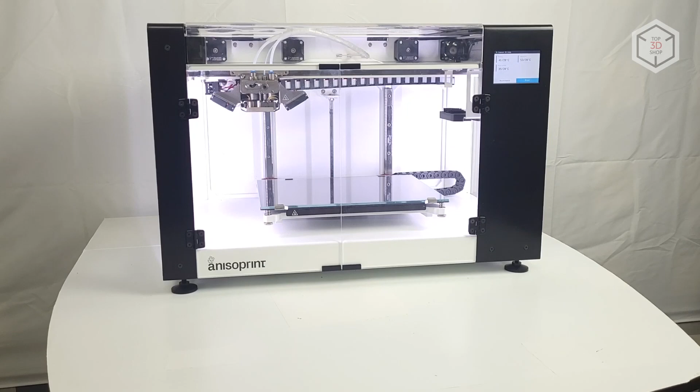Hi everyone, this is Top 3D Shop, and in this video we will tell you about the Anisoprint Composer A4 3D printer. Anisoprint specializes in making interesting 3D printer models capable of printing parts reinforced with continuous carbon or basalt fiber.

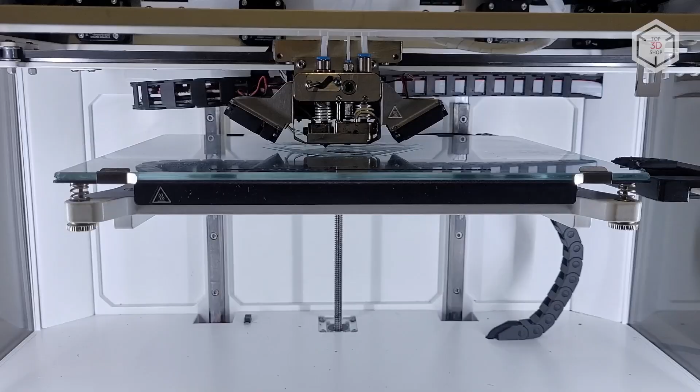On the internet, you can find different reviews and webinars about the company's printers, but most of them come down to impressive figures and descriptions of the technology's incredible possibilities. In this video, we would like to review this printer from the end user's perspective. We will talk about the specifics of its use, limitations, and peculiarities without boring you with a large number of charts, formulas, and terminology. Still, a little bit of theory might be helpful.

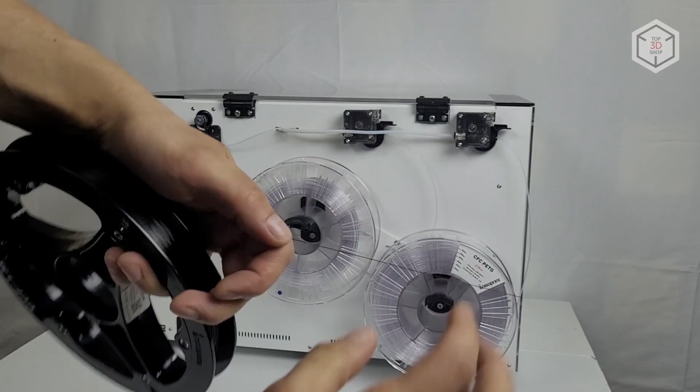Isotropic materials have the same mechanical properties in all directions, regardless of the load angle. Anisotropic materials, on the contrary, are characterized by different properties in different directions. For example, carbon and basalt fibers feature very high tensile strength along the fibers, but it takes much less force to break them across. It looks like anisotropy of the material could be considered a disadvantage, but with the correct load calculation and the appropriate algorithm for laying the fibers, it is possible to obtain lightest parts with the strength concentrated in the proper areas and maintained at the corresponding load angles.

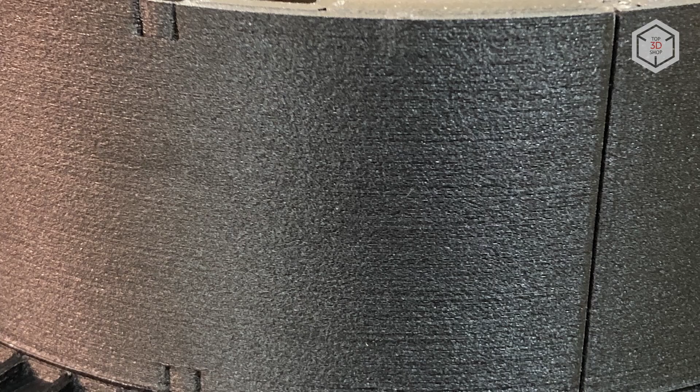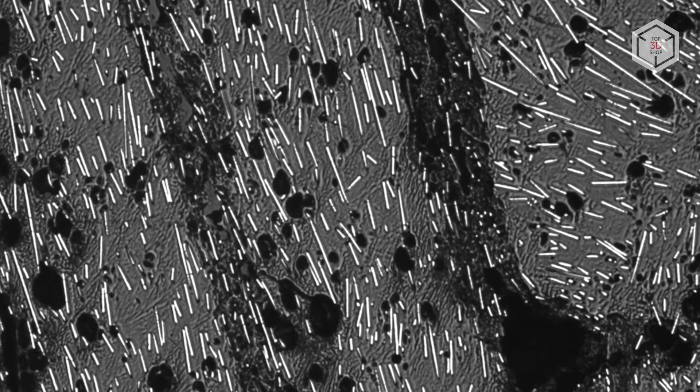In recent years, so-called composite, or more correctly, filled filaments, have become popular in 3D printing. They are two-component materials consisting of thermoplastic and carbon or glass fiber filler. Such filaments are stronger, stiffer, and show less shrinkage than basic thermoplastics, but carbon and glass fibers are added to such filaments in a milled form. Thus, one of the most useful properties of the fibers, namely the highest tensile strength, is almost totally lost in filled filaments. Composite materials made of continuous fibers have been utilized in manufacturing for quite a long time.

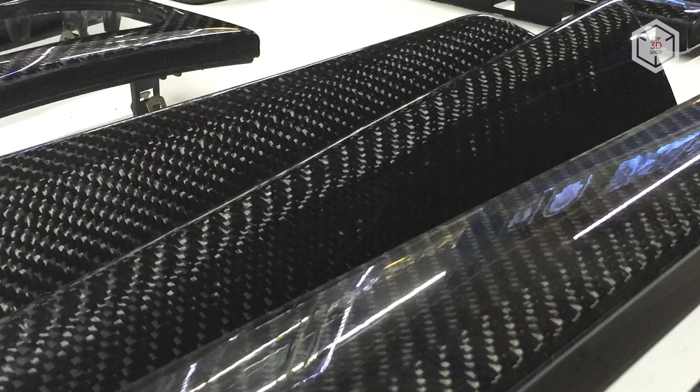They are a kind of fabric with carbon or basalt fiber being used instead of threads. The fiber can be either one-directional or laid out at different angles in several layers. We will not go into detail except to say that such materials naturally possess good strength properties, but on the other hand, they have their drawbacks as well.

In addition, there is a way to create so-called mesh structures out of continuous fibers. Such a method with proper load calculations makes it possible to create more durable, still several times lighter in weight parts compared to similar aluminum models, for example. Such use of fibers allows making the best out of anisotropy.

Based on their experience with such types of carbon and basalt fiber laying, Anisoprint engineers created their proprietary 3D printing technology, which they call Anisoprinting. Those following the development of additive manufacturing long enough are aware that a similar technology has already been used by the Markforged company, and they are really much alike. However, there are a few noteworthy differences. We will touch upon them in the course of our review.

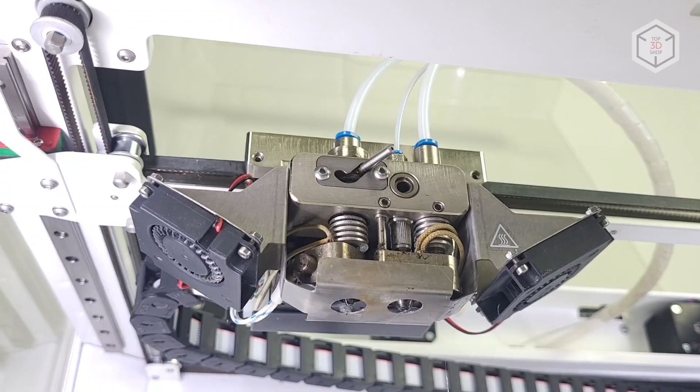Now let's take a closer look at the printer. We have the most compact model of Anisoprint 3D printers, that is the Composer A4. We should mention that this particular sample has been displayed at many exhibitions and printed a huge amount of parts, so don't be surprised that it doesn't look brand new. As long as Anisoprint is constantly refining and improving their printer models, some parts may appear to be slightly different from what is being produced at the moment. However, the operation principle and basic idea remain the same.

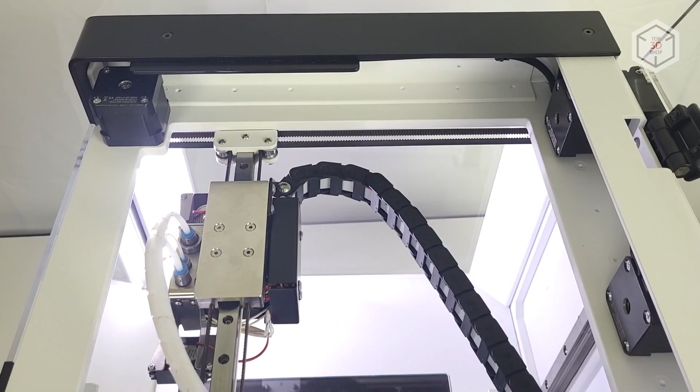The design of the Composer A4 does not differ much from most 3D printers we are used to. The build area is 297 by 210 by 140 millimeters. The frame is made of 8mm aluminum, which gives the printer a large margin of safety. The device feels very reliable.

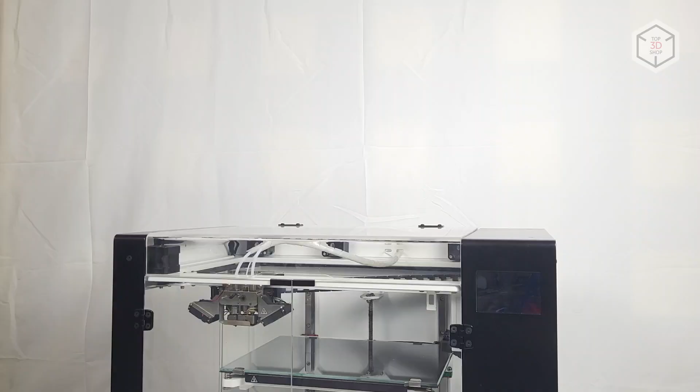The printer is lined with acrylic sheeting. It has two doors with magnetic locks at the front. On top of the machine is a hinged cover. It can be opened when printing low-melting materials to avoid overheating of the plastic. When printing with high-temperature filaments prone to shrinkage, the top cover and front doors can be closed to create a passive heated chamber. In the right top corner at the back, there is an exhaust fan that automatically turns on when the temperature inside reaches 60 degrees Celsius.

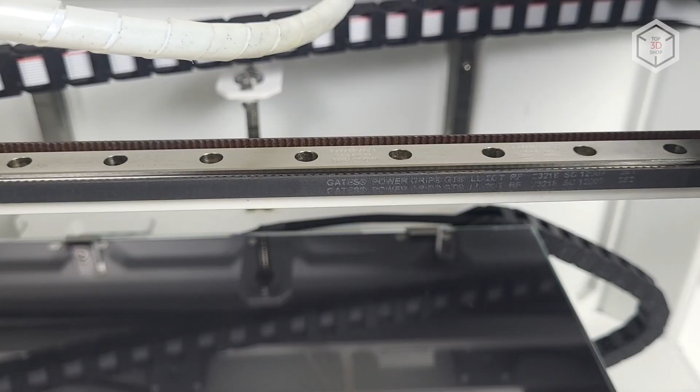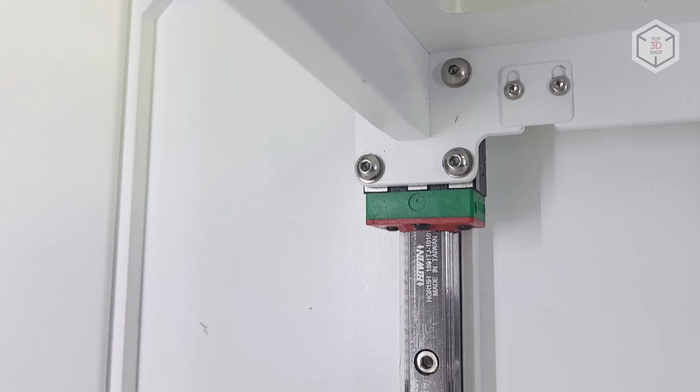The kinematic scheme here is classic Core XY. The print head is moved with two long 8mm belts produced by the Gates company. The X and Y axes move along high-quality 12mm HIWIN rails. They are driven by NEMA 17 stepper motors mounted at the front of the printer. The Z-axis runs on two 15mm HIWIN rails, and it is driven by a screw motor.

A trapezoidal single-thread screw comes out directly of the motor without any couplings. The motor itself is located inside the lower compartment.

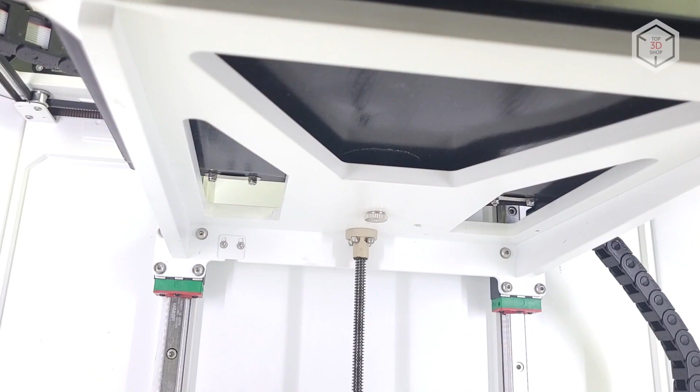The print bed is cantilevered, meaning it is attached to one side. Nevertheless, the bed frame is massive and solid so that the bed does not sway during printing.

It is covered with a glass build plate which is held in place with two fixed brackets in the back and two hinged ones in the front. The glass can be easily removed and put back on.

The maximum print bed temperature is 120 degrees Celsius. Calibration is done manually by 3 points using a software assistant, but more on that a bit later. All of the printer's end stops are optical, which gives high-axis positioning accuracy before printing.

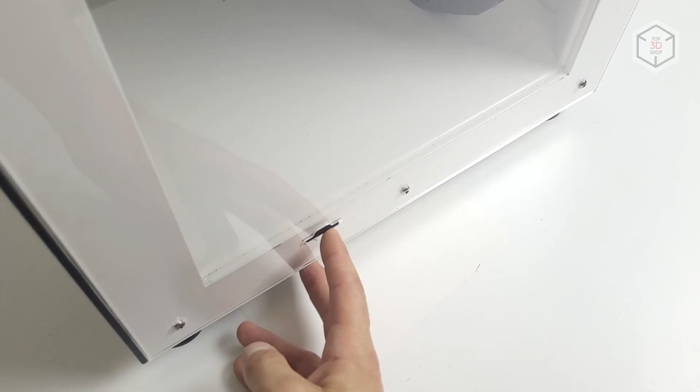You can print from a full-size SD card or via a USB cable. The port for an SD card is on the right side of the printer.

The extruder - to be more precise, there are two extruders here. On the left, there is the usual hot end with a hardened 0.4mm nozzle, which can be changed to a 0.6 one. The nozzle type here is V6. This hot end is utilized for basic or filled filament printing.

It can be used alone when printing standard polymer parts, or together with a composite hot end to print fiber-reinforced models. The left hot end has a lifting mechanism so as not to interfere with fiber printing. The mechanism is quite simple, but due to that, it is very reliable. There are no servos or other motors used to switch hot ends.

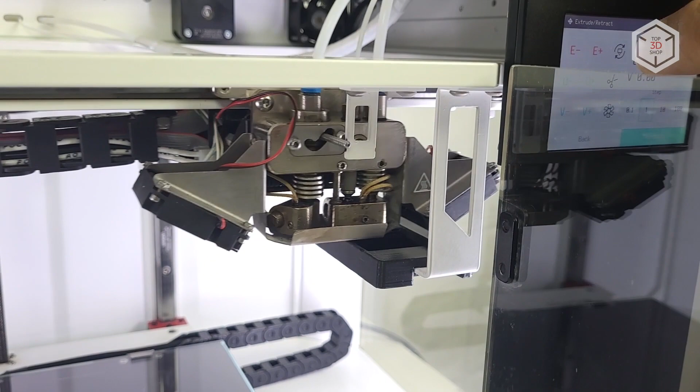The print head travels to a special projection on the right, which moves a lever in a V-shaped notch. While moving from left to right, the hot end goes down, and moving from right to left, it goes up.

The right composite extruder is developed in-house by Anisoprint. It has a special nozzle with a diameter of 0.8 millimeters. The reinforcing carbon or basalt fiber is fed into the hot end from the top.

The polymer is fed into the same hot end from the right side, and then it comes to a special compartment in the way of the fiber. Passing through this compartment, the fiber collects a small amount of plastic and is extruded on the part. This is necessary to ensure proper adhesion with the previous layer.

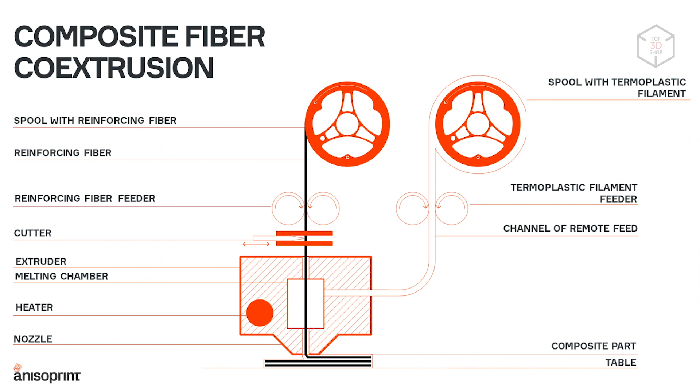On the top of the hot end is a fiber cutting mechanism. It is a rotary knife, which is driven by a servo motor hidden inside the print head.

Whenever it is necessary to switch from one hot end to the other, shortly before that the knife turns, cutting off the fiber. After that, the print head travels a certain distance to allow the remaining fiber to be extruded on the part. Then you can make the transfer or switch the hot end.

The print area is cooled by two 4010 turbine fans located on both sides. To prevent the fans from blowing on the heating units, there is a metal barrier at the bottom.

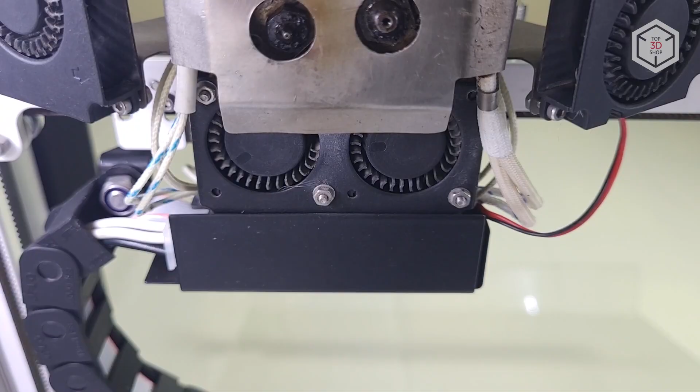Two 4010 fans are used to cool the heat sinks of the hot ends. They are located in the back and turn on automatically when the temperature of the hot ends reaches 60 degrees. All the printer's fans are manufactured by the GDS Time Company. They are pretty quiet and do not produce any tangible vibrations.

To make sure that after downtime the hot ends are not clogged with leaked polymer that can spoil the model, there is a small part on the right designed to clean the hot ends and collect the remnant plastic.

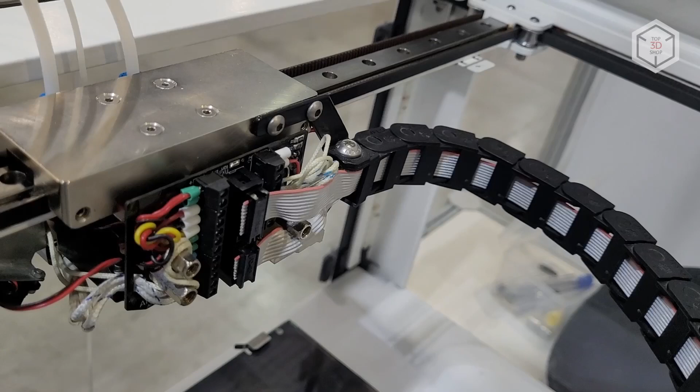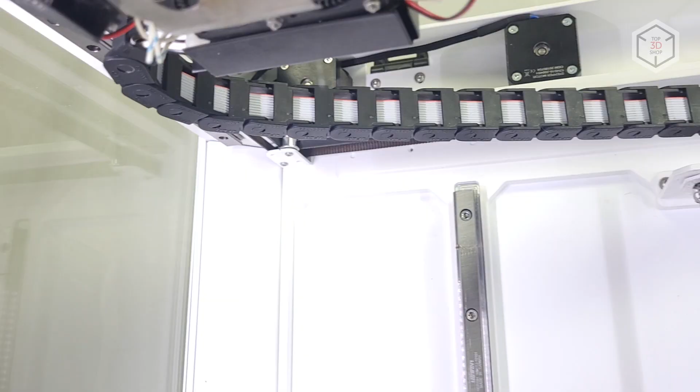On the back of the print head, you can find a distribution board. The wires from the sensors and heaters are connected to the board, making it easy to replace damaged elements if necessary. The wires from the board are arranged in a cable chain. It's worth mentioning that all printer wires are neatly routed and hidden, so nothing dangles and spoils the look.

Both printer extruders are Bowden type. The feeding mechanisms with motors are placed on the back wall, and both polymer and fiber are fed through Teflon tubes. This model uses Titan-type geared feeders for plastic.

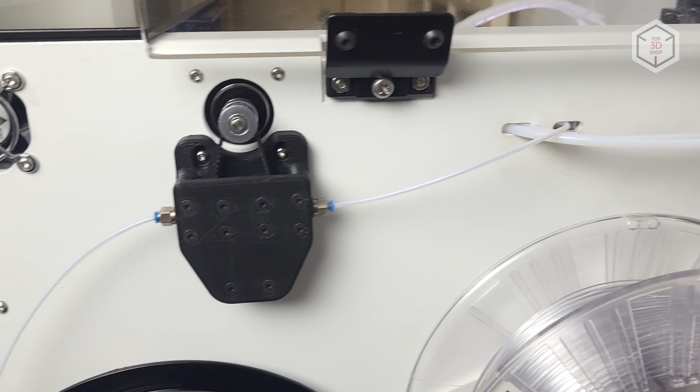For the fiber, Anisoprint has designed a proprietary feeder. It uses two small circular adjacent belts. The construction allows the fiber to be fed without slipping, and the belts do not damage it while moving.

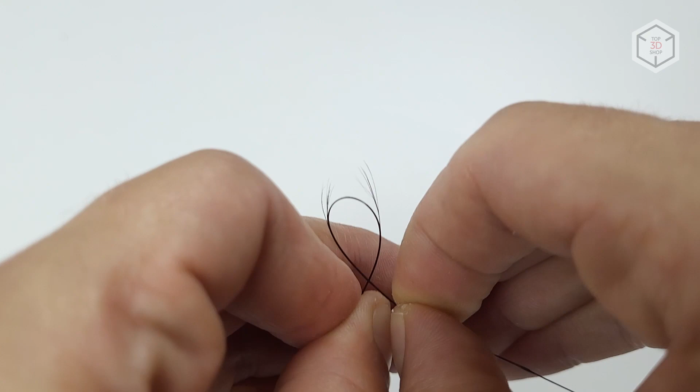Now, what is this fiber all about? To begin with, it looks like a solid string with a diameter of about 0.36 millimeters. But in fact, it is a bunch of very thin fibers, carbon in this particular case, impregnated with a special resin. This provides the string's uniformity and ensures that it does not split when being fed and can be accurately extruded while printing.

The manufacturer strongly recommends the use of Anisoprint proprietary fiber made with their patented technology. You can, however, give a try to third-party fibers, but this can lead to serious extruder clogs. For the auxiliary plastic used along with the fiber, as well as for the left hot end, you are free to use any filament types by different manufacturers.

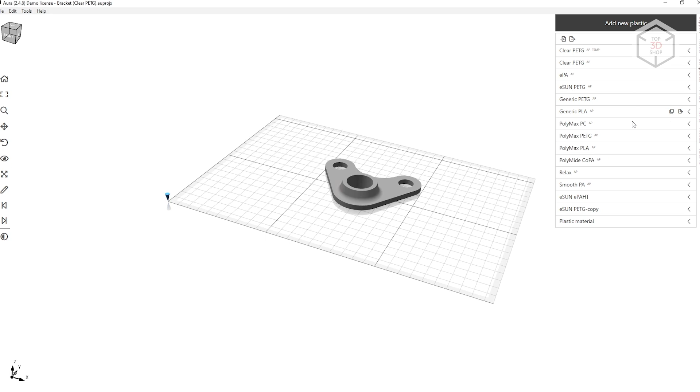This is one of the differences between the technologies used by Anisoprint and Markforged. The latter also uses prepared fiber, but it is directly impregnated with thermoplastic, usually nylon. The composite hot end feeds and immediately fuses it. For this reason, you have certain limitations on material compatibility. As a consequence, with Markforged you're not only restricted to the proprietary fiber, but the plastic for the other hot end can only be selected from a small suggested list, as the slicer limits your choice of settings to a great extent.

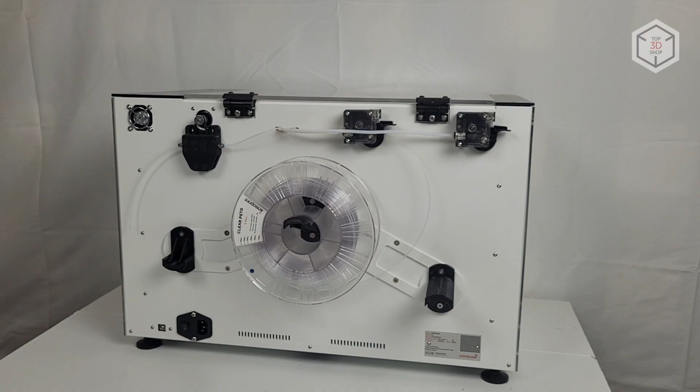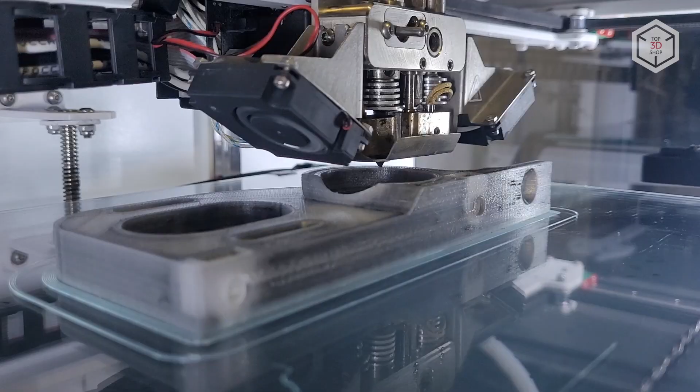Certainly, Anisoprint also recommends using plastic and fiber tested by the company's engineers. In this case, you're more likely to get the desired results, but potentially you have the opportunity to experiment with the printer and both plastic and fiber materials, as long as they are compatible with the hot end design. The Aura slicer, with an open license, allows you to adjust the printing parameters very precisely, which gives you room for experimenting, albeit at your own risk.

In addition, the composite extruder construction and the system of co-extrusion of fiber together with plastic allow printing not only reinforced contours, but also reinforced infill. This provides better control over part strength and helps reduce their weight.

There's not much point in speaking about the control board and electronics of this particular printer modification, as recent versions feature quite different electronic components. Anyway, it has no effect on the performance and capabilities of the device, except that new versions are equipped with a more modern and high-quality board.

In the right top corner of the front panel, there is a touchscreen used to operate the printer, with a quality sensor and the menu interface reflecting the printer's distinctions. The main screen shows the temperature of the two hot ends and the heated print bed.

By choosing the corresponding option, you get to the heating menu. Here you can manually set the desired temperature. There's also a button to turn the heating off and the auto button. By tapping it, you set the last temperature used. Both hot ends can heat up to 270 degrees Celsius. The maximum print bed temperature, as mentioned, is 120 degrees Celsius.

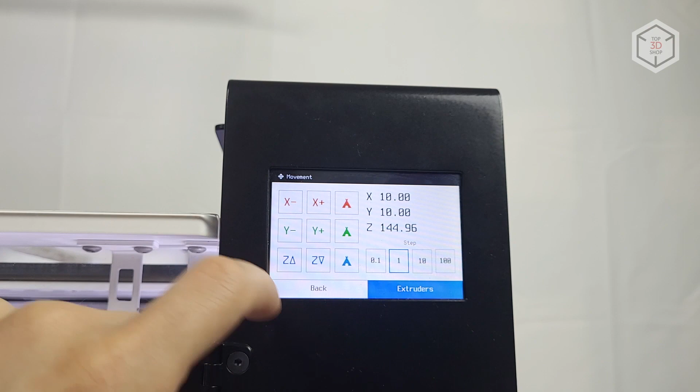The maintenance menu contains all the other functions and settings. The materials option is an assistant for loading and unloading all materials. The move menu allows you to manually move the axes of the printer. With the extruders option in the move menu, you can control plastic and fiber feeding, as well as manually start the extruder change mechanism, cut the fiber, and turn on the print area blowing.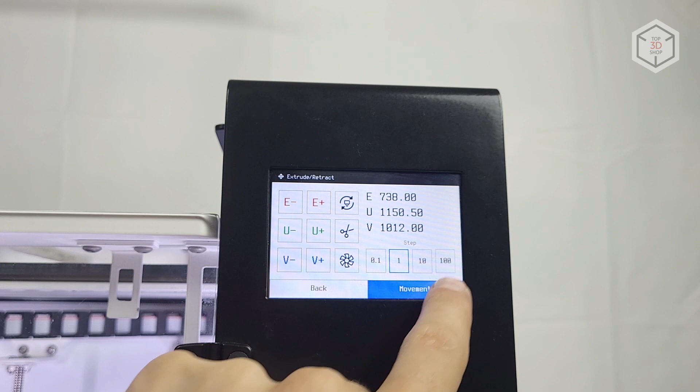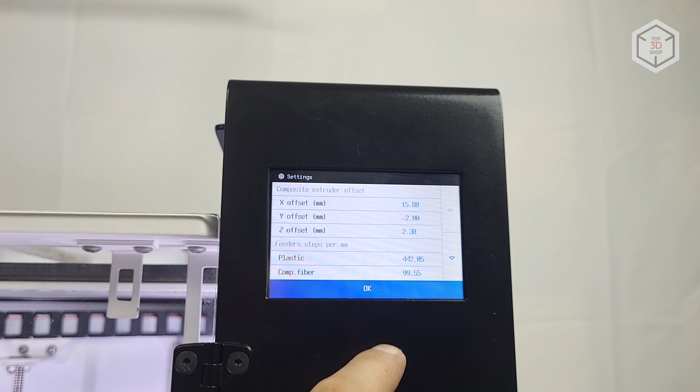The calibrate menu contains the print bed and hot ends calibration assistants. In the settings menu, you can manually adjust the offset of the hot ends from the print bed and each other. These parameters can be adjusted during the calibration process. There are also steps per millimeter and PID settings, but these are factory configured and you don't usually need to change them. The debug info menu contains data on the axes and heater status.

In About Printer, you can find information about the printer version, firmware, etc. And last but not least is the print option, which allows you to send G-code files for printing.

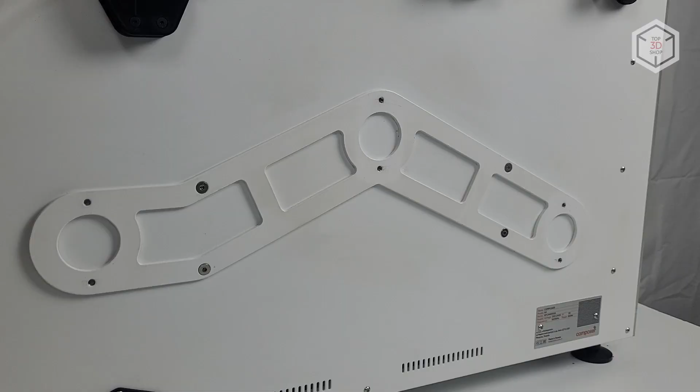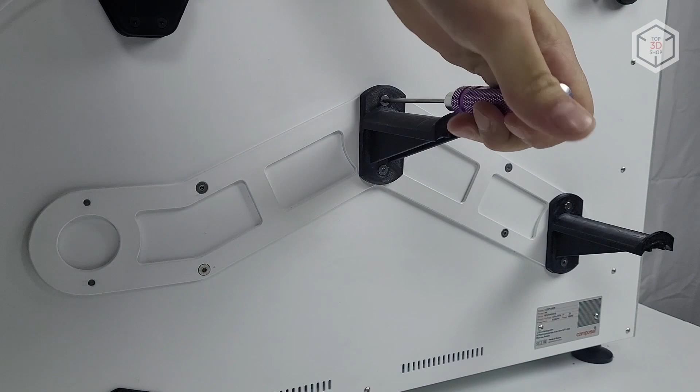Now let's move on to the printer preparation, calibration, and print tests. The printer comes fully assembled. The only thing you need to do is screw the filament and fiber spool holders to the back wall. When you look at the back panel of the printer, the filament spool holder for the left extruder should be in the center. On the right is the auxiliary filament holder for the composite extruder. The short holder for the fiber spool should be mounted on the left.

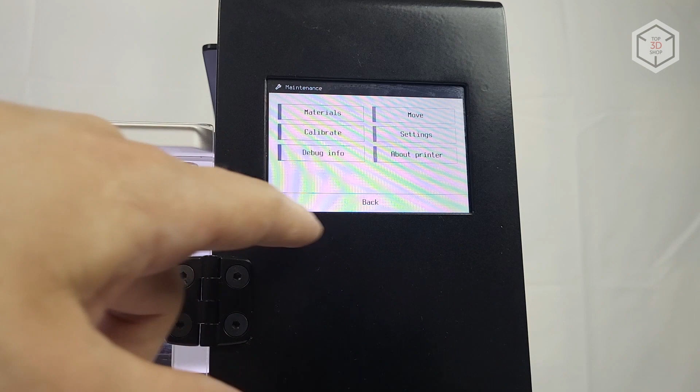The next step is to calibrate the print bed and the extruders. The printer menu offers the corresponding assistants. First, go to the Calibrate Build Plate menu. The printer will prompt you to heat the bed to the temperature required for printing. When it is done, the print head will pull back to the rear center point, where one of the three adjusting screws is located, and go down to a height of about 10 millimeters. Via the printer menu, gradually raise the print bed, reducing the distance.

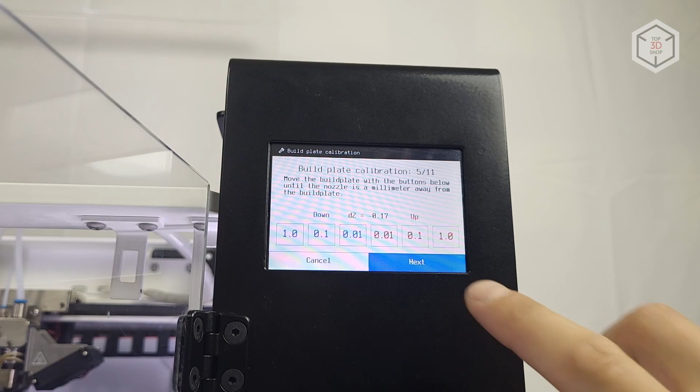Put an A4 sheet of paper between the nozzle and the print surface and wait until you feel the light resistance of the paper sheet when it is moved, just as it is done with any other printer. Press Next on the screen, and the print head will move to the near left corner. Adjust it with the help of a paper sheet by simply turning the screw. Once again, press Next and adjust the right corner in the same manner. Then repeat the entire process to make sure the bed did not tilt during the first adjustment.

Next, it is necessary to check the left extruder offset on the Z-axis. Go to the Calibrate Z-axis menu. The print head will move to the center of the print bed and stop at the height of 10 millimeters, just like with the first calibration. There's nothing new here. Just put a sheet of paper and move the print bed up via the printer menu until the paper can be moved with a slight resistance.

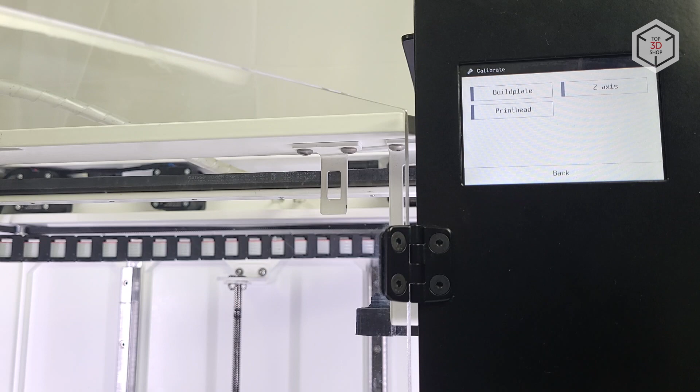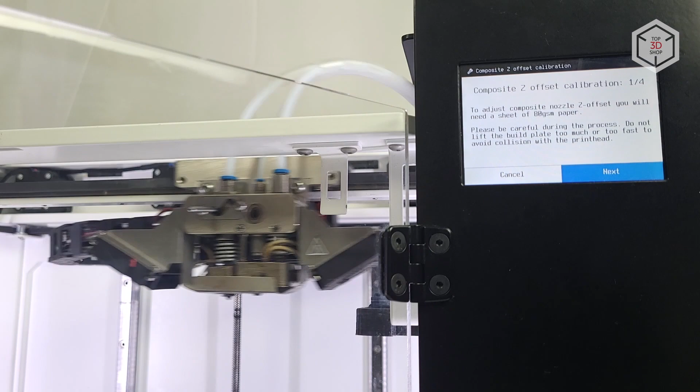The next, and probably one of the most important steps, is to calibrate the offset of the composite extruder from the plastic one on the Z-axis. Go to the Composite Z-Offset Calibration menu. The print head will move to the side and elevate the left hot end. After that, it will go to the center. As in the previous step, adjust the height of the right extruder with a sheet of paper. In this case, the sheet should pass between the nozzle and the print bed almost freely, with the right distance being about 0.3 millimeters. At this point, it is difficult to know if the composite hot end is leveled properly, and it requires certain skill.

If the hot end is too high, the fiber will not adhere well. If it is too low, the fiber can break and clog the composite hot end when extruded into the plastic. And that is not the experience we would wish anyone to gain. Cleaning the composite hot end is rather troublesome.

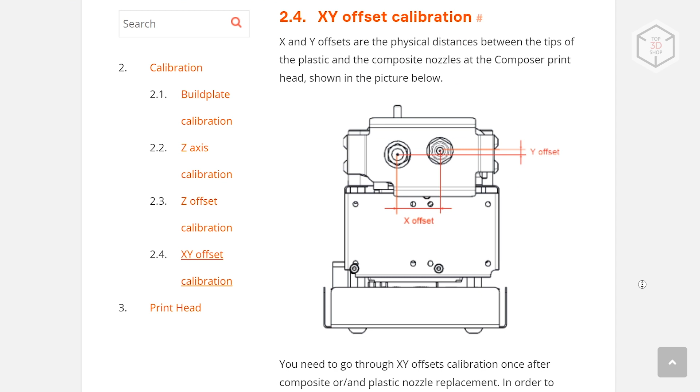The last thing to do is calibrate the XY offset of the hot ends. For this, you need to print a test G-code file, which can be downloaded from the Anisoprint website. Be sure to load the printing materials beforehand. If the printer is new, you can start loading immediately.

But if it's been in use for some time, it is highly recommended that the composite hot end be thoroughly cleaned. To do this, via the printer menu, turn on the composite extruder heating to the temperature you used last time. Now you can clean the hole all the way through from the nozzle to the hot end with a small drill or a special needle. While cleaning, you will see plastic remnants on top. You need to carefully remove them with fine tweezers. Continue until you are sure that the channel for the fiber flow is clean and has no residue on the walls. After that, you can start loading materials.

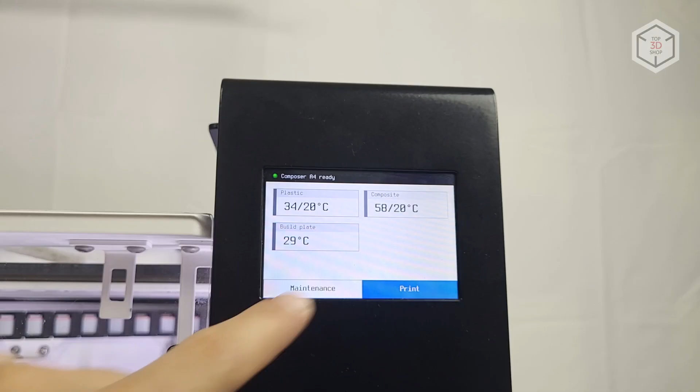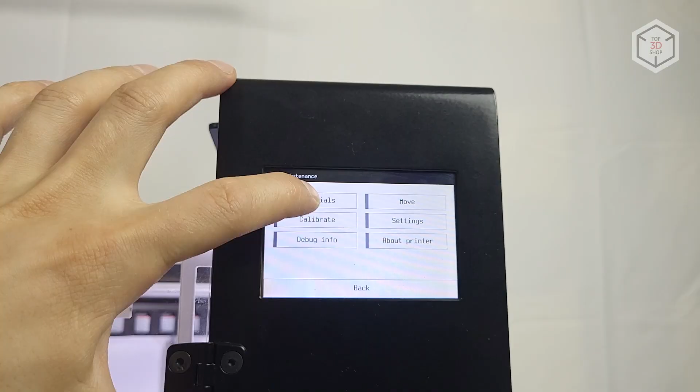As with the calibration process, there is a special assistant in the printer menu to help you do this. For the left hot end, everything is simple. Its spool should be located on the central holder, and the left hot end feeder is in the middle. Insert the tip of the filament into the feeder. Go to the Materials, Plastic, Load menu. Heat the hot end to the desired temperature and then follow the instructions on the screen. At first, the filament will move fast, slowing down when approaching the hot end. Wait until the plastic starts to come out of the nozzle, and then you can finish the loading process.

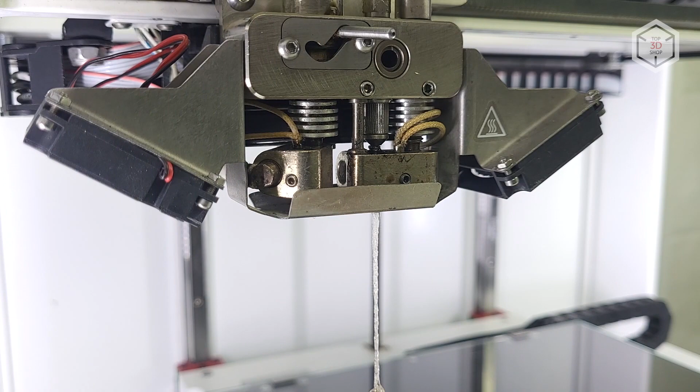With the composite hot end auxiliary plastic, the procedure is pretty much the same. The only thing to take extra care of is the droplets of plastic that appear when the filament starts to come out of the nozzle, slightly squeezing over the heating block from the fiber inlet. These droplets must be carefully removed with tweezers so they won't interfere with the fiber feeding.

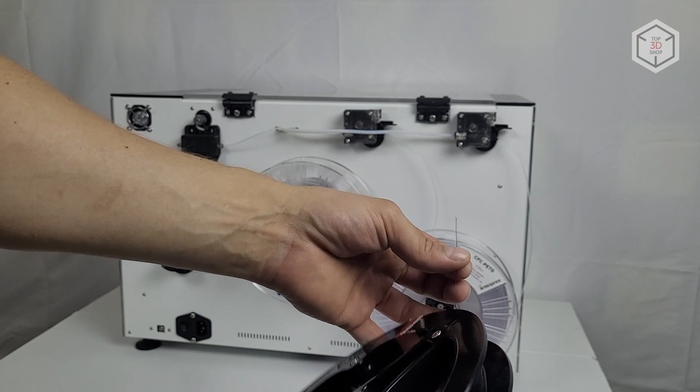With fiber loading, the procedure is still the same. Just remember that the fiber must be handled with extreme care. First, never let go of the loose end of the fiber, otherwise the spool will unwind immediately. In this case, you will have to unwind it to the point where the fiber is straight and gently wind it back on. Secondly, take care when touching it. If you lead your fingers over the fiber, it can leave splinters under the skin. Be sure to wear protective gloves, or at least do not press your fingers against the fiber.

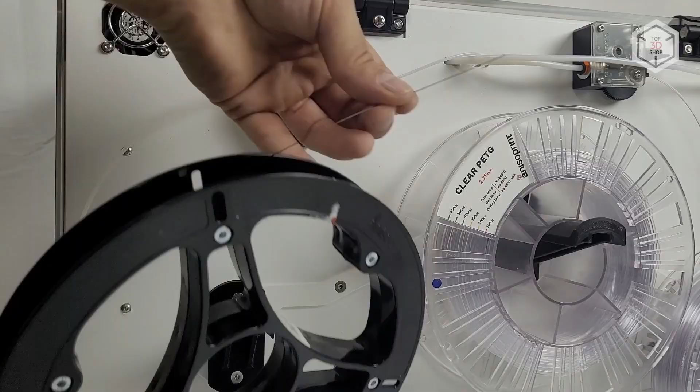Place the fiber spool on the short holder, gently bring the tip to the feeder, and slightly twist the feed gear of the motor until the feeder grips the fiber. Then follow the instructions on the screen.

The fiber will begin to move forward and emerge from the right hot end. When the loading process is finished, the knife will cut the fiber, which is to be manually removed from the hot end. When the materials are loaded, run the file downloaded from the website to calibrate the extruder's offsets.

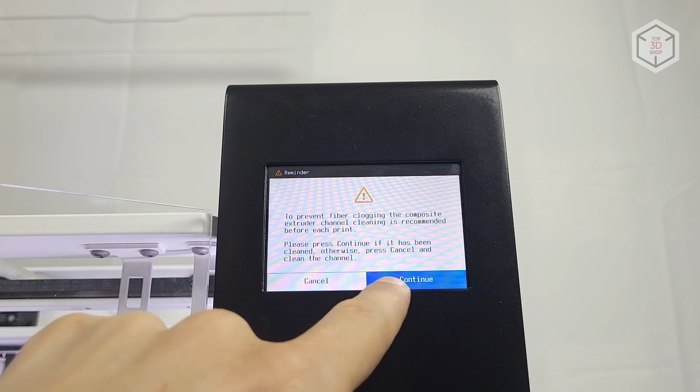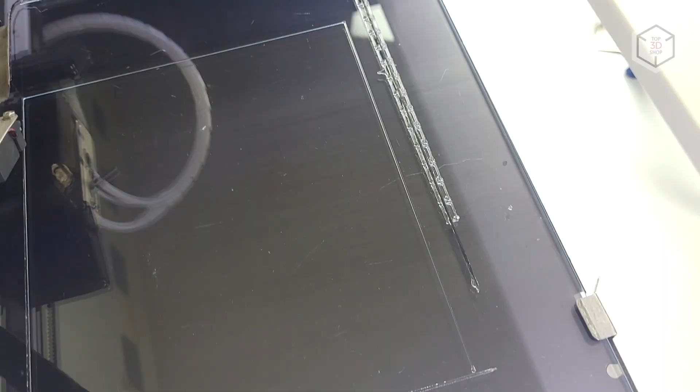The device will print a large rectangle for you to see if the Z offset calibration has been done properly. It will also print two rows of small rectangles for the X and Y axes. After that, the hot end will switch over, and the printer will build one line with the fiber on top of these rows. You need to find the small rectangles where the fiber runs exactly in the middle, then define the position of these rectangles relative to the center and thus calculate the necessary offset.

The row of rectangles that goes from left to right is responsible for the X-axis offset. Each of the rectangles corresponds to an offset of 0.1 millimeters. To the right of the center there are positive values, and to the left are negative.

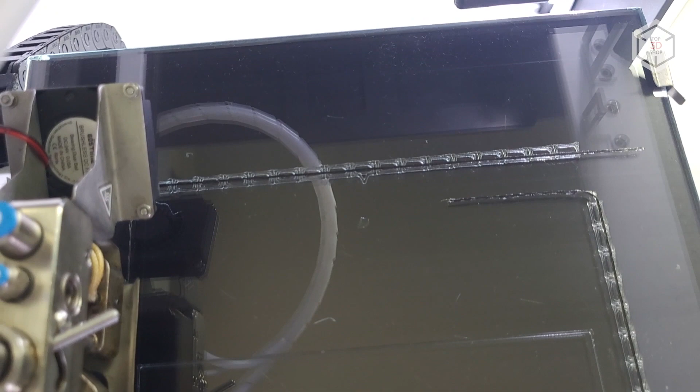The row that is printed front to back is responsible for the X-axis. The positive values are to the front, the negative ones being to the back. Once you have calculated the required offsets, you need to make the appropriate adjustments in the printer settings. All of these procedures are described in detail in the instructions on the manufacturer's website. If something is not clear, you can always find the necessary information there.

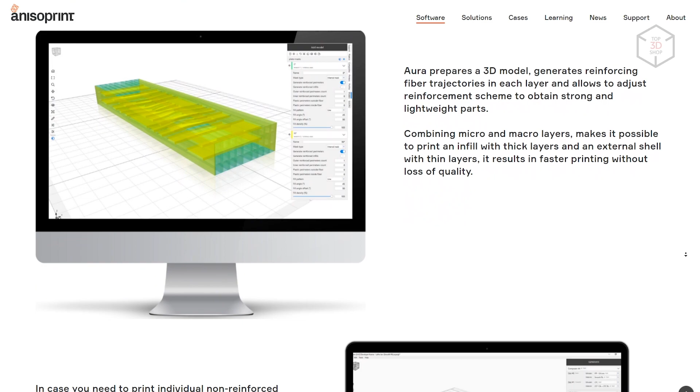To prepare models for printing, Anisoprint offers a proprietary slicer called Aura. It allows you to slice models both for conventional polymer printing and for making fiber-reinforced composite parts. Aura has three license types, differing from each other in the number of settings and, accordingly, in price.

The simplest license version, called Neat, provides access to the minimum set of necessary parameters. It allows printing with only two basic filament types, namely PETG, which is produced for Anisoprint by the REC company, and Smooth PA, a special polyamide produced by Polymaker. The settings menu offers a choice only between these materials in conjunction with two fiber types: CCF is carbon fiber, while CBF uses basalt.

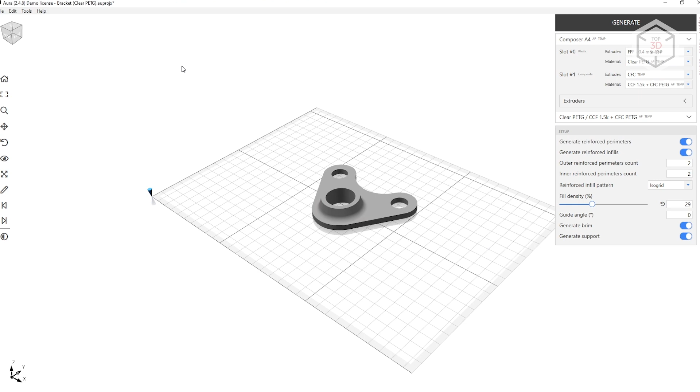It is possible to turn the reinforcement on and off for outer contours and inner holes with a line number adjustment, select and configure the reinforced infill, turn on the supports, and manage a few more settings. There's no way to change temperatures, speeds, layer heights, and the like. The slicing software will decide everything for you.

This type of license is usually used by manufacturing companies. It gives you minimum settings, a limited number of supported materials, but at the same time, more predictable and consistent results. In comparison, the Ext license gives you access to more material types, for which you can change temperatures

and retraction parameters for the plastic extruder. For the composite extruder, there is only the choice from a large number of materials. There is also an opportunity to adjust print profiles, but there are not a lot of options here. You can also adjust the type and percentage of infill for the plastic hot end, with a few settings for support structures and several more parameters.

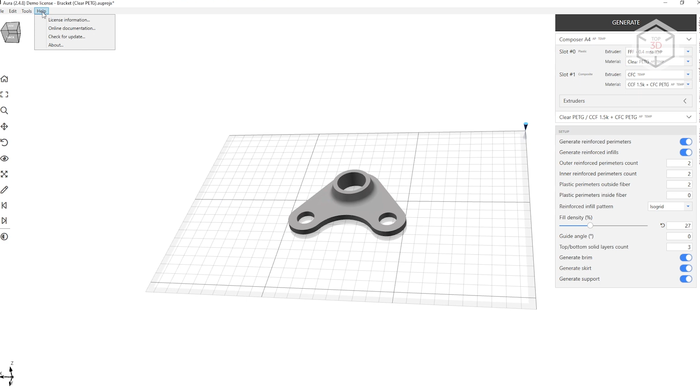Finally, the most advanced license, called Open, allows you to adjust everything down to the finest parameters. This license can be helpful, for example, for research institutions. It opens wide opportunities for experimenting with the printer and various materials.

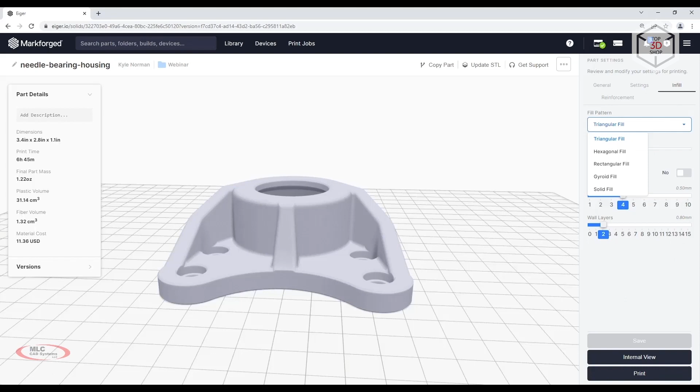The Ext and Open license types are the second major difference between Anisoprint and Markforged. The latter offers a decent slicer, but it does not allow customizing any material or extruder parameters. On the contrary, Aura enables you to adjust almost any parameters that might be of some help when using specific materials, like for instance chemical resistant or easy to post-process materials. In addition, the printer firmware understands the common G-code commands, so if you have the appropriate skills and knowledge, you can operate the printer the way you'd like to.

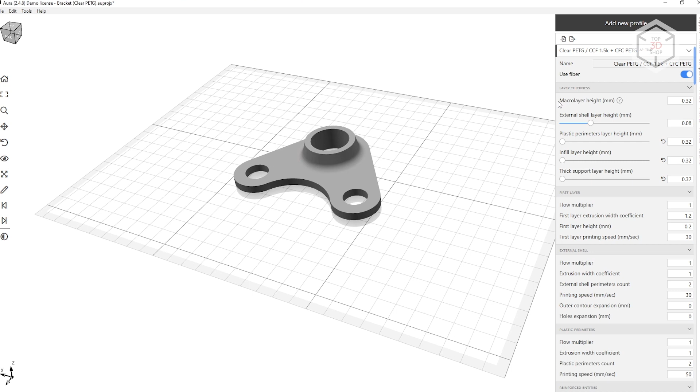We're not going to talk in detail about all the features of the Aura slicer, otherwise this would take long hours. In short, it offers an enormous number of parameters. We would like to mention only a couple of interesting things. First, Aura uses the so-called macro layer system. Its essence is as follows: different parts of the model, inner and outer perimeters, infills, and supports can be printed with different layer heights, as if catching up with each other during printing.

For example, inner perimeters can be built with a layer height of 0.3 mm to reduce printing time, and outer perimeters can be set at 0.2 mm to give a smoother surface. Thus, a single 0.6 mm macro layer can contain two 0.3 mm layers of inner perimeters and three 0.2 mm layers of outer perimeters. Meanwhile, the height of the fiber reinforced layers always corresponds to the height of the macro layer. This sounds a bit complicated, but you usually don't have to adjust these parameters.

Besides, you can only access them with the open license. The second thing is the fiber printing speed, which is as low as 10 mm per second because of the specifics of the technology. It's even slower at the beginning and end of the movement, because otherwise the fiber can have poor adhesion with the underneath layer or even break. When printing with the plastic extruder, the speed is higher, but it does not exceed 50 mm per second in preset profiles. Higher speeds are possible as the printer's kinematics allow for it, but in order to avoid possible problems and print failures, they are not recommended.

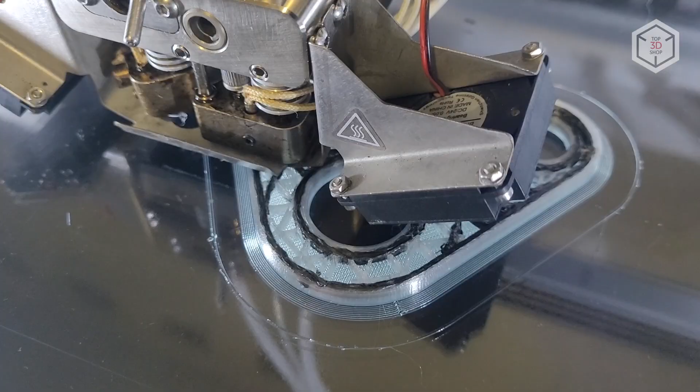One more thing we'd like to mention is that the structure of the composite hot end does not allow building short sections of fiber. The minimum length here is 45 mm. After the knife cuts the fiber, it needs to completely come out of the hot end, passing a certain distance. Consequently, when printing small parts or narrow sections, Aura simply will not route for the composite hot end. For the same reason, there is no way to reinforce perimeters around small holes. The minimum diameter of the holes can be about 12 mm, depending on the number of plastic and reinforced perimeters.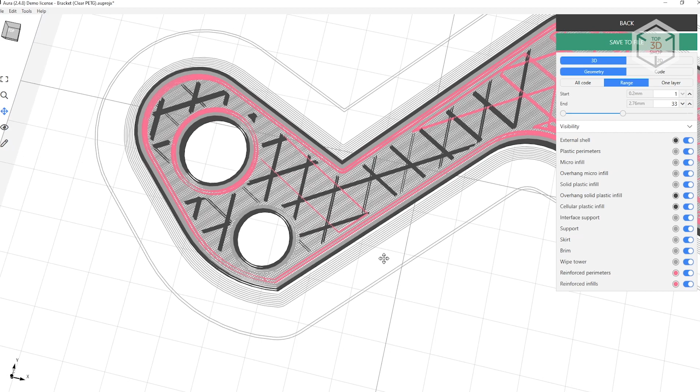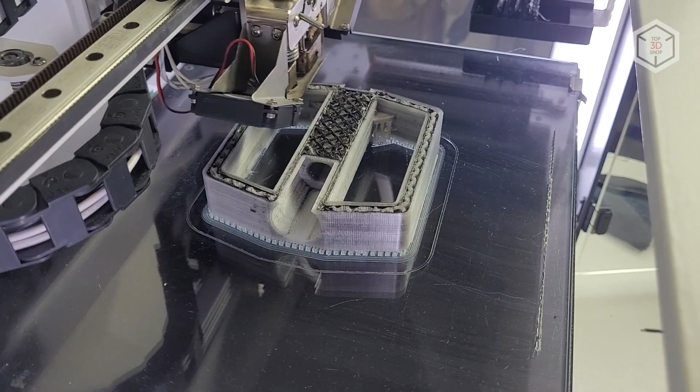These points must be considered when modeling parts you are going to print with fiber. Finally, let's move on to testing. In this video, we are not going to conduct any experiments to test the strength of reinforced parts. Full-fledged objective tests require special machines and typical parts. Without such equipment, simple attempts to break something give little information.

Besides, we already did an experiment with scales once. Then it took about 3 times as much force to break a small hook reinforced with 2 fiber contours as it took to break an ordinary plastic one made of PETG. As for some objective values and figures obtained under laboratory conditions, you can always check them on the Anisoprint website.

So we took PETG filament along with carbon fiber and tried to print one of the examples that the slicer offers at the start. This is a small part with 3 holes. No major problems were encountered during the process.

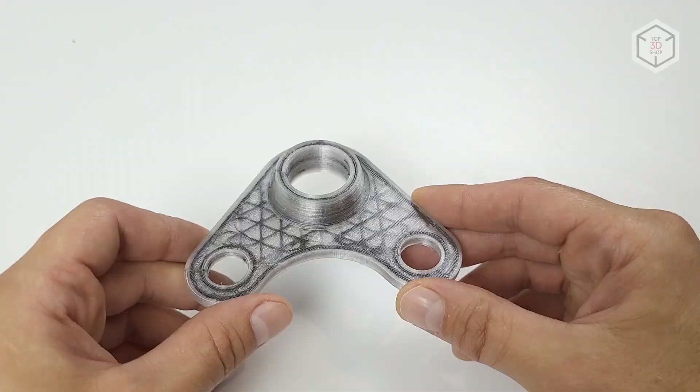There were some moments when the fiber would slightly bend next to the nozzle at the beginning of a new layer. We may have done something wrong while calibrating the composite extruder. It didn't look very nice, but gradually these areas were covered by the upper layers and smoothed out, and the top plastic layers ultimately hid these flaws. Besides, when printing the reinforced contours, fiber particles sometimes got on the plastic perimeters, leaving small black dots on the surface. We do not have any complaints about the plastic extruder, as it did everything right, though not fast.

Overall, the part turned out pretty good. It might be not as neat as shown on the website and in the brochures, but for the first test, it was okay. For the second test, we modeled a non-complex part to print it in 3 ways. It is a kind of lever with holes and a notch.

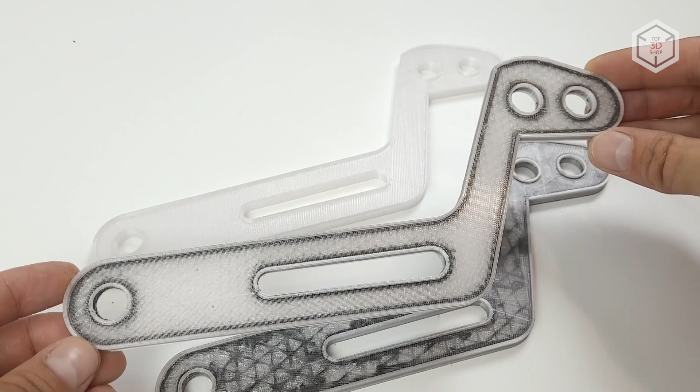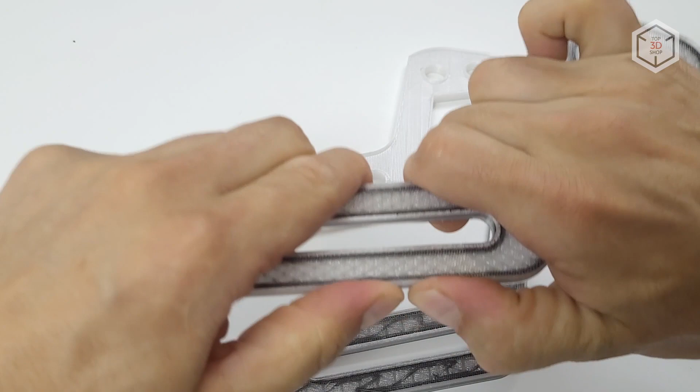In the first version, we printed it with PETG only, and in the second version, we added reinforced contours. For the third time, we used both reinforced contours and reinforced infill. As expected, the plastic part turned out to be the softest and the most unstable. The sample with reinforced contours felt much stronger, not only along the fibers, but also across. Apparently, the fiber fused into the plastic gives the reinforcement effect and strengthens the part in all directions. And the part with the fiber added wherever possible felt the most rigid.

The quality of the printed part is very good, although the same difficulties as in the first test also occurred. They were especially evident on the fully reinforced part. In addition, at the modeling stage, we encountered constraints related to the minimum distance of fiber printing. For this reason, the holes in the part are as small as possible for Aura to design reinforced contours around them. And in the narrow areas near the notch, the reinforced infill turned out to be incomplete. In the most important areas, though, everything was printed as it should be, but this had to be taken into account when modeling.

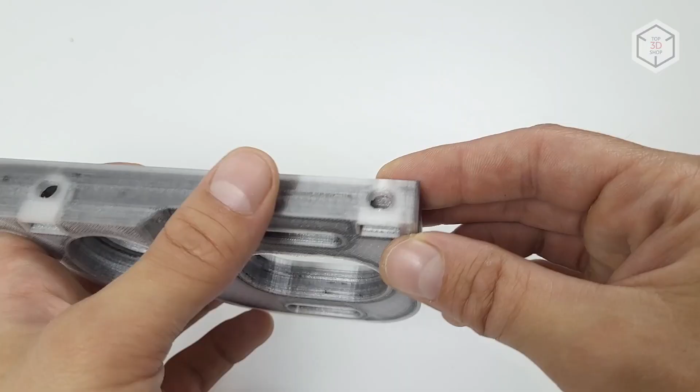For our third and fourth tests, we tried printing parts not designed for this printer. The suspension element of the radio-controlled car turned out right only with reinforced contours. The fiber infill was almost nowhere to be found, and even a couple of areas that could be good to reinforce came out purely plastic because of the specifics of the model. In other respects, the part was printed well, being definitely stronger than the non-reinforced part would have been.

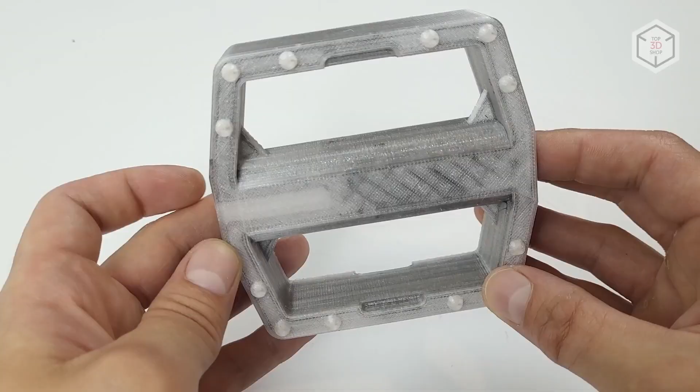Another thing we printed in the course of testing was a bicycle pedal. It allowed us to combine both the reinforced contours and the infill. Again, though, there were some areas with none of it. With this model, we checked the Aura Slicer's ability to build support structures, and they were built well and easily removed without leaving any marks on the surface.

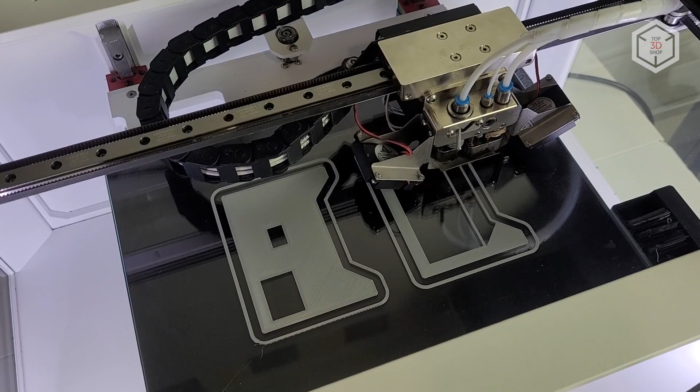For the next test, we decided to check how the printer would manage simple printing with randomly chosen old cheap ABS plastic without any reinforcements. We printed some housing parts for the power supply unit. Everything went well. Thanks to the passively heated build chamber, no shrinkage of the ABS occurred during the process. The corners did not peel off, the thin walls did not crack. After the cooling, the parts remained flat.

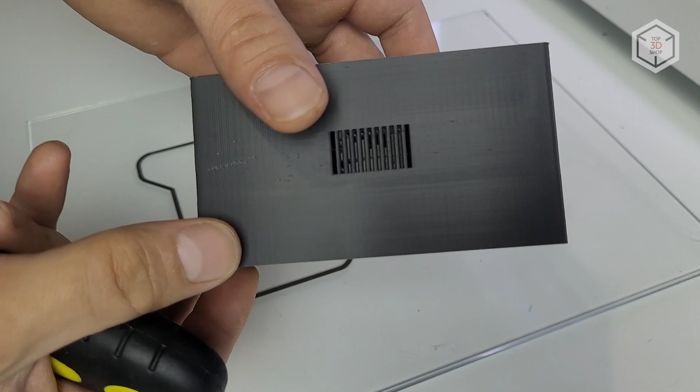The only weak point was the visible layering in the grid areas. Apparently, the minimum retraction distance in the slicer was set too large for such gaps, and the transfers in these areas took place simply without retractions.

Next, we tried to print another model offered by the slicer. The model is quite interesting because the fibers here are laid along certain calculated routes. Such parts have to be prepared separately. Roughly speaking, these are 3 models combined in one step file. The first model is the base, it will be printed in plastic, and the other 2 are designated as so-called masks and will be reinforced.

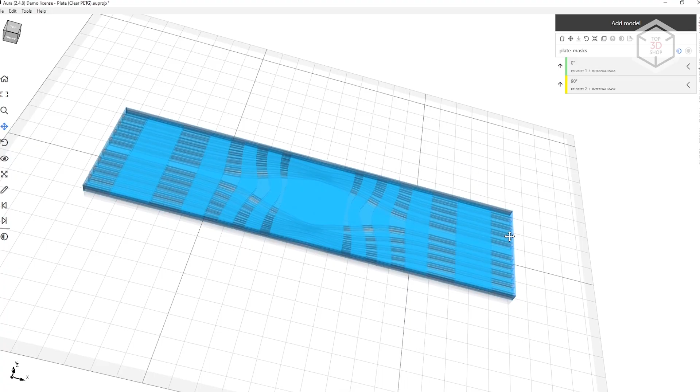Thanks to correctly calculated loads, the part has almost the same tensile strength along its entire length, despite the weak area with the hole in the middle. When calculated properly, this printing method provides the best strength results because you are not tied to automatic algorithms and can decide where and how the part will be reinforced and where it is not necessary.

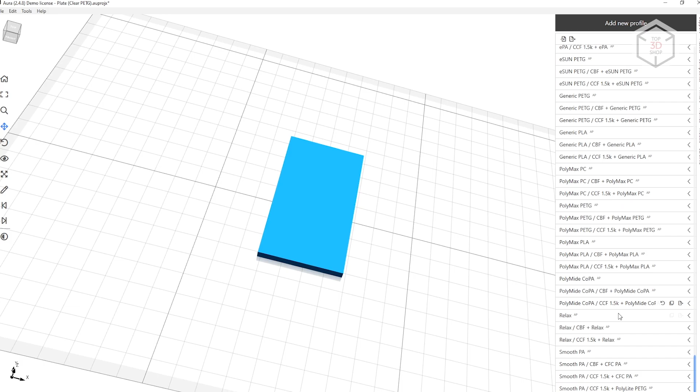For our final test, we decided to experiment with materials. In the majority of profiles, Anisoprint suggests using the same material type for both extruders, and only for the plastic hot end the material can be filled. Still, we tried using pure polyamide with carbon fiber for the composite hot end, and loaded the plastic hot end with fiberglass-filled ABS. The printing temperature for both materials is about 250 degrees, but will the fiber with nylon be able to adhere properly to ABS?

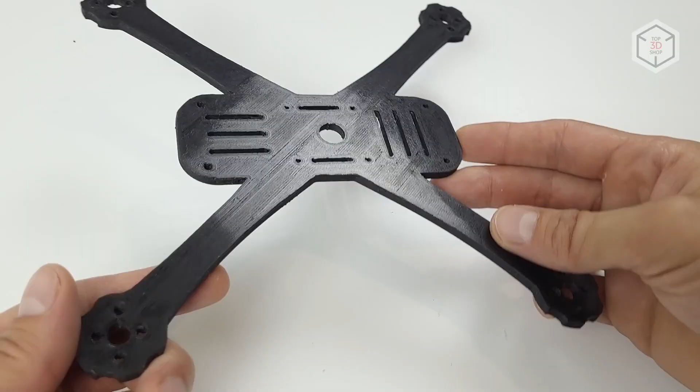First, we printed a small test rectangle, and it turned out that such a combination worked quite well. The reinforced infill and contours laid on the ABS without any problems. So we tried printing a small frame for a racing quadcopter in the same manner. All went well. The frame was printed out, the fiber laid well, and the covers closed. The experiment can be considered a success. The only thing to keep in mind is that for such experiments with materials, you need Aura with the Open or at least Ext license.

Let's draw a conclusion. The Anisoprint Composer A4 is an impressive device. It employs an original technology which allows you to print lightweight and strong parts with complex geometries. Even in spite of the low printing speed, the production of such parts will be faster and easier than with other methods. It is possible to use materials with different properties, such as abrasion or chemical resistant. The print quality is totally decent as well.

With that being said, the printer requires a certain amount of skill. A single mistake in calibration may lead to a couple of hours spent on cleaning the composite hot end. Once we had such an experience, the construction of the composite hot end and the specifics of fiber placement require a good understanding of the process and proper model preparation for this printing method.

If you need to print very strong lightweight parts reinforced with basalt or carbon fiber, if you are not afraid of the difficulties that can arise during operation, and you want to have access to all the features of the device and all the settings, then you will not find any analogs to this printer.